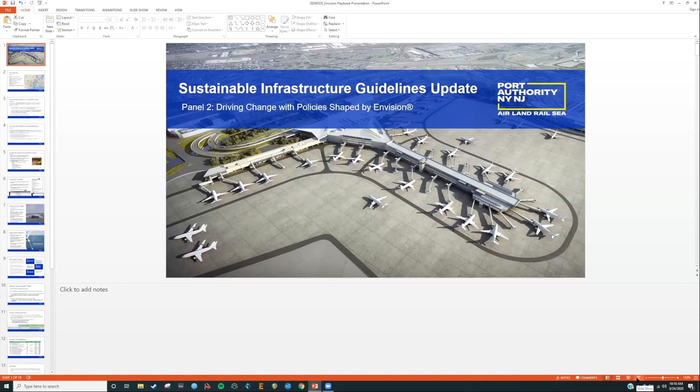Again, my name is Derek Tonning with HDR, and I'm actually filling in today for Josh DeFlorio. He's the Chief of Resilience and Sustainability in the Port Authority's Engineering and Architectural Design Division. So I work under Josh's group as a full-time sustainable design consultant. And one of my primary responsibilities in this role is leading the update of Port Authority Sustainable Infrastructure Guidelines.

And as we'll see, the update will be modeled after the Envision version 3 framework, and there'll be some modifications to suit the unique set of facilities and processes that the Port Authority has.

So for those of you unfamiliar with Port Authority, this map shows the wide variety of facilities that they own and operate across New York and New Jersey regions. They have the airports, JFK, Newark, LaGuardia, and a few others. The seaports, of course, the Trans-Hudson crossings, the George Washington Bridge, the Bayonne, the Lincoln and Holland tunnels, Port Authority bus terminal, and the George Washington bus station. There's the PATH train with 13 stations across New Jersey and Manhattan, and of course the World Trade Center complex in downtown Manhattan.

And for perspective, the Port Authority has a capital plan budget of $37 billion over the next 10 years. And this doesn't include some of the private investments that are happening with the current JFK redevelopment efforts. All told, that's about $50 billion over the next 10 years. So with a program this size and this large, sustainability is obviously very important. Everything that our group can do now, just by sheer scale, has the potential for a large net positive impact on sustainability and on the environment.

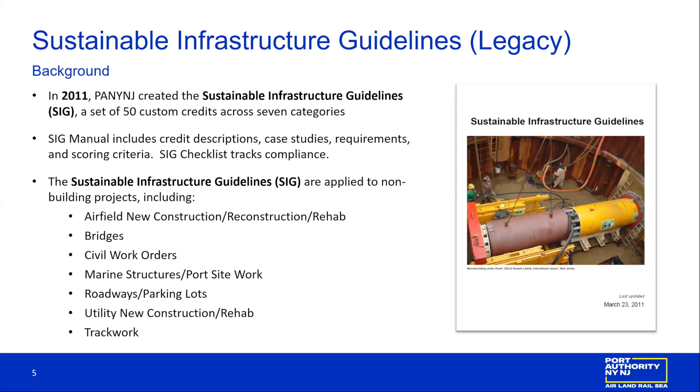The SIG will apply to almost all non-building projects that have significant scope. Some examples of common projects for Port Authority are listed here: airfield new construction or reconstruction, bridge work, marine structures, roadways, parking lots, track work. All of these projects in general will have to meet some sort of minimum threshold of achievement in the SIG.

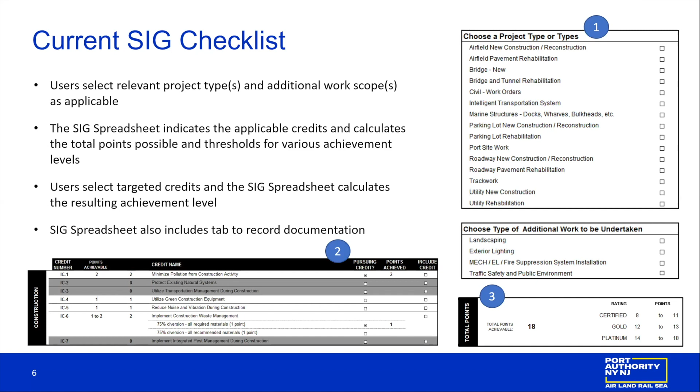So why does Port Authority need to update the SIG? Well, the obvious reason is because a lot has changed since 2011, and now there's an opportunity to align with some of the current best practices.

Since we developed some of the credits in 2011, some of these have become the norm. For example, some that cover sustainable construction practices have been incorporated into standard Division 1 clauses in the contract. So these credits are no longer really pushing the envelope as far as sustainability is concerned. We want to update some of those.

Looking at historical utilization of some of these credits, we see that some are receiving too many points for a relatively small return on investment. Port Authority definitely wants to adjust some of the scoring issues and inequities that happen, and would like to iron some of those out. In general, there are also some gaps that need to be filled in, and a need to align with more updated Port Authority sustainability initiatives.

So the decision was made fairly early on to align the new SIG with Envision. Some of the reasons for that is because it responds to a lot of the issues that we mentioned in the previous slide. Envision reflects the current best practices for sustainable infrastructure.

There's a robust and tested scoring system that's already been established. We can leverage all the pre-established training modules, the templates and documents developed by ISI. This eliminates the need for Port Authority to then have to update and maintain a custom system every so often. The system is flexible and can be modified to suit Port Authority.

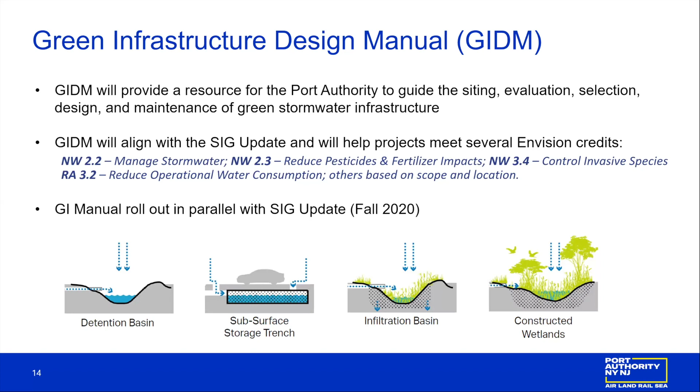Again, the rollout will be in parallel with SIG, which is still scheduled right now for the fall of 2020. With that, thanks everyone for calling into the sessions. We're looking forward to hearing from the other speakers as well, and then answering any questions you have at the end.

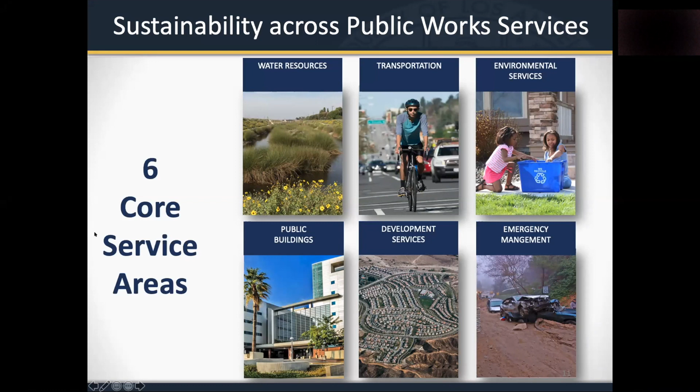The county as a whole, and LA County Public Works in particular, has always placed a high value on sustainability. Investing in sustainability is one of the key focus areas of our strategic plan, which sets the direction for our entire agency. Our administration is committed to community-based infrastructure planning to provide the most sustainable programs, services, and infrastructure to our communities.

Now, how do we apply that to infrastructure management? We believe sustainable infrastructure should be environmentally protective and directly aligned with and supportive of the community's needs by creating socioeconomic co-benefits, and should be an efficiently functioning system that enables cost savings. This new approach helps avoid a piecemeal approach in infrastructure planning and therefore manages infrastructure as one integrated system that is directly connected with the community and meets the complex expectations for modern infrastructure.

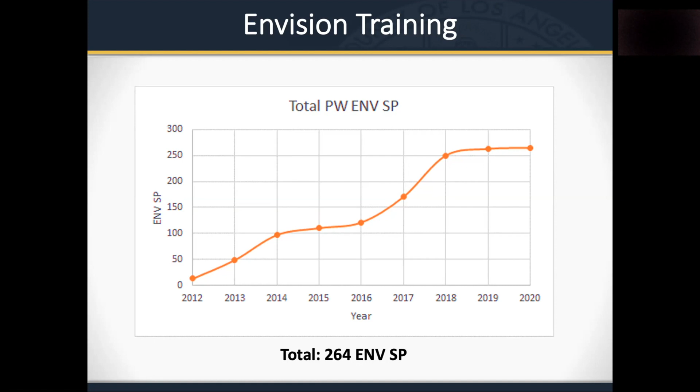Now, with Envision being the county standard, I'll talk about how we're using it to transform how we deliver infrastructure. Sustainable infrastructure can only be achieved when sustainability principles are implemented in all phases of infrastructure planning, and we are using Envision to lead such institutional changes. In the next few slides, I'll go through how changes can be implemented in planning, contracting, delivery, and maintenance phases.

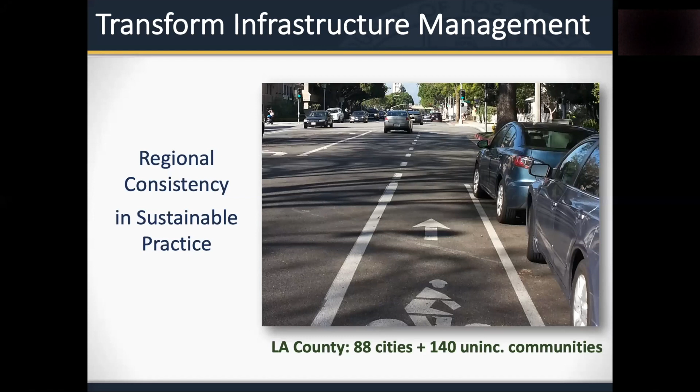Studies have said that more than 60% of material procurement in the US is through institutional procurement, such as corporations, schools, and governments. This means the power of institutional procurement can move the entire industry's supply chain. In the infrastructure sector, this includes design and construction services or material purchase for day-to-day maintenance. Public Works sometimes uses contractors to assist with project designs, and we saw this as an opportunity to integrate Envision use and rating as a deliverable by consultants. Our internal working group developed specific language in RFPs requiring consultants to have ENV SP credentialed staff on their team and experience using Envision.

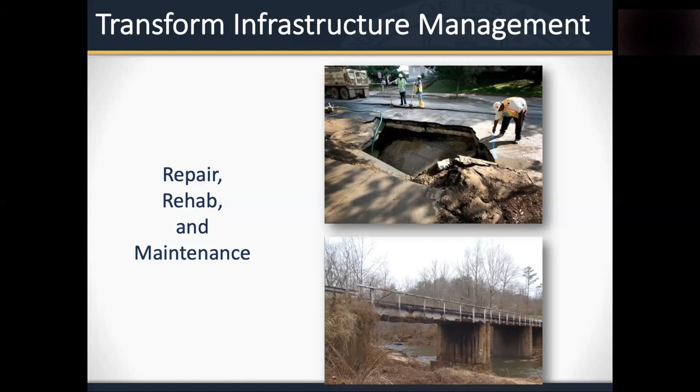Once the Envision County standard was approved, we wanted to look at ways to expand the use of Envision within our own agency. This led to the development of an internal working group called the Envision Planning Team, made up of representatives from each of our business branches.

The efforts of the Envision Planning Team include finding ways to integrate and expand Envision at each business branch in its own protocol and project delivery process. To us, Envision is more than just an award. The true value is a framework that allows us to discuss and measure sustainability across the full range of our services, from capital improvement projects with a full application of Envision, to routine improvement projects such as repair and maintenance activities with a limited scale programmatic approach. I'll show you some examples in the next slides.

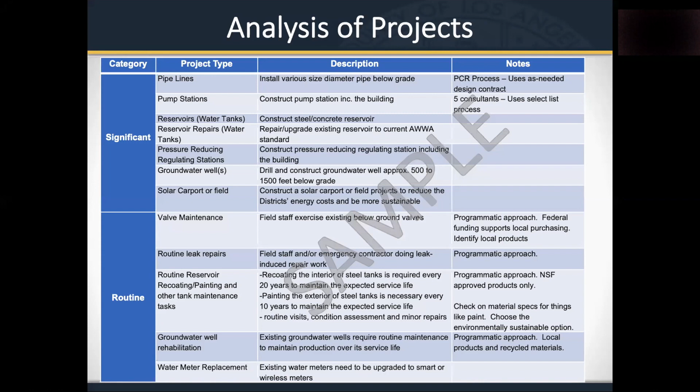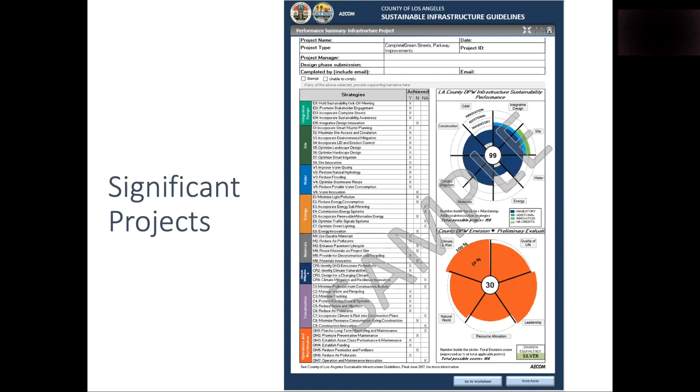This slide illustrates how Envision is applied to significant projects through the help of SIG, the Sustainable Infrastructure Guideline. The left-hand column shows the SIG evaluation checklist as a reinterpretation of Envision credits. The two pie charts on the right illustrate how a project is scored within SIG and how that scoring translates into an Envision rating. Following these guidelines, a typical project would rate around a Silver Envision rating, and it's up to the design team to decide if they should pursue additional sustainability measures.

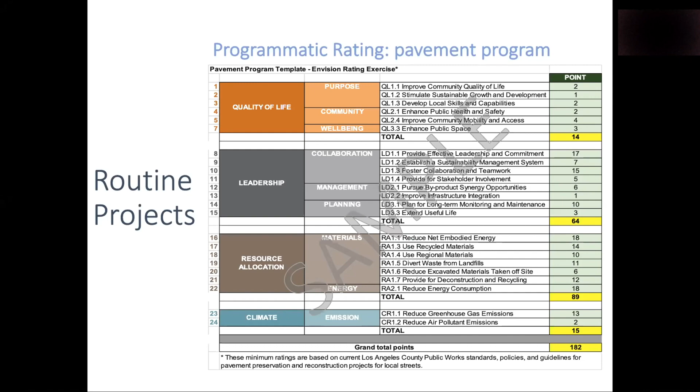Here are some quick takeaways from my presentation. First, we want to emphasize that developing sustainable infrastructure involves institutional-level changes across all phases and components of infrastructure delivery, and Envision has been the key vehicle to enable that. Use of agency- or company-wide policies and programs will expedite these changes. Dedicated analytical tools, such as design guidelines and project databases, will further help guide and track progress and identify areas for improvement. Lastly, we recommend working with other agencies and infrastructure partners in the region to ensure and enhance the socioeconomic benefits that infrastructure should bring as a system.

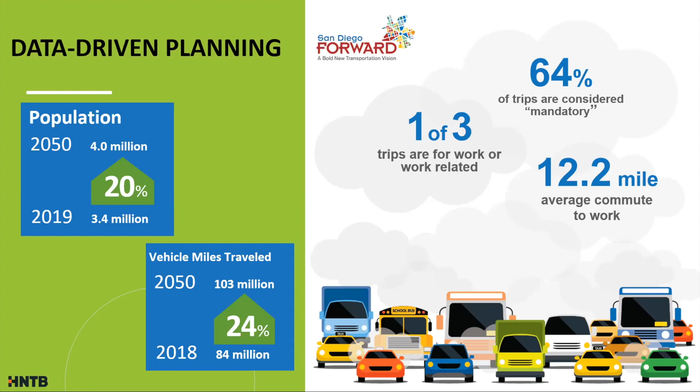So this is where the other elements, such as flexible fleets and next operating systems, become really important. Now, I can't really share a lot of the new maps since they're still being tweaked and haven't been released. But what this evolved into was some specific investments in high-speed transit lines.

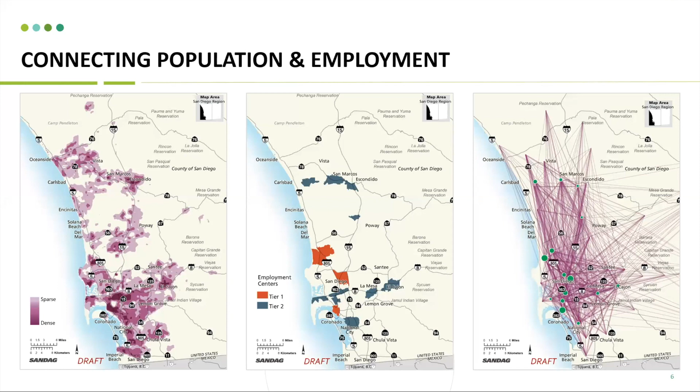There was also a lot of outreach done during this process. Usually our transportation system is traditionally planned from the bottom up. Generally, cities look at growth projections through land use projections and make their own choices about transportation systems, and those wish lists go up to the metropolitan planning organization that creates a regional vision. So it's really bottoms up, and our process somewhat disrupts this because it's looking at regional data and trying to better inform land use practices. It's a little bit in the other direction.

So it's very important to use new techniques to reach out to the community when doing this type of planning. We went out and did human-centered design, some of you might know it as design thinking, but it's really focus groups, intercept interviews, and resident focus groups to start to understand the core barriers people face in transportation.

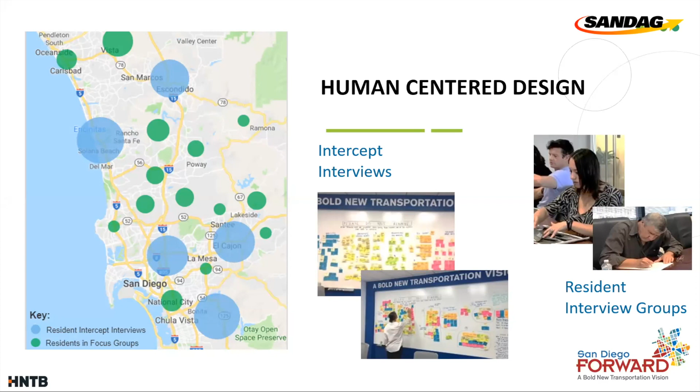You can imagine that a lot of this research yielded some inconsistencies, where people believe that a transit system should be for everyone, but also feel like the system is unsafe. Here are some of the responses - this is very interesting - safety and security was a big factor.

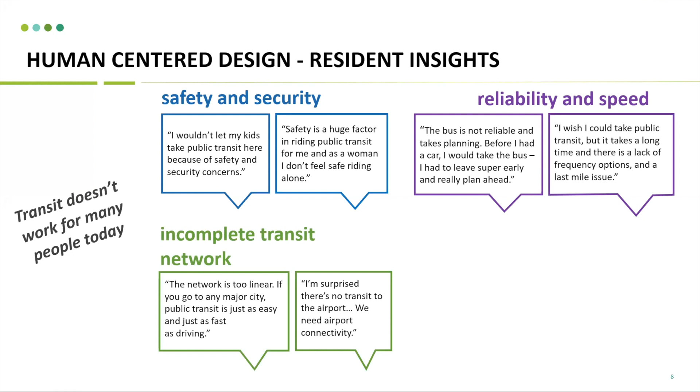Reliability and speed - in San Diego, most transit trips will take twice as long as an automobile, so most people don't take it because of the time and unreliability. There's an incomplete transit network - it can be very circuitous as you try to reach all areas with one line, with one route. And it's really inadequate for people who are transit dependent, needing more school bus-like services.

We have unsafe biking conditions that were also called out, along with micromobility infrastructure and regulations. We've been playing around in this country with micromobility for the last 5 years at least, but we really haven't thought through how our infrastructure can serve these new technological solutions. They are a barrier and a safety concern if you don't have the appropriate infrastructure for people to be safe and store them adequately. So to me, infrastructure is a huge piece of making sure micromobility works, which can take on the short trips in many cases.

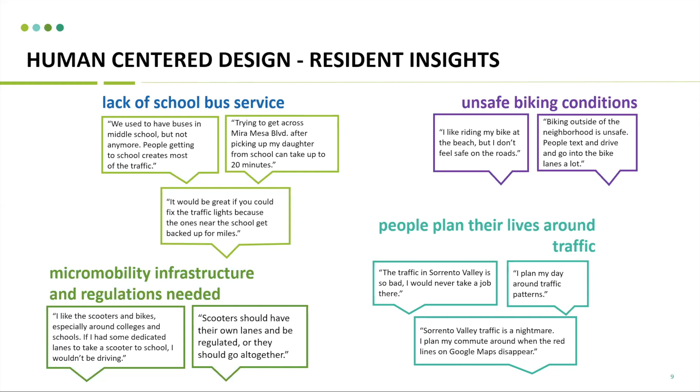Really everybody's used to planning their lives around traffic, and so travel behavior is also informed by how we feel traffic is going to be. I come from Costa Rica, and in our traffic jams it might take an hour to travel a mile at peak time. So you experience distance differently by the speed that you can travel, and that has both good and bad consequences, of course. So without further ado, that's a lot of information.

We've done a lot of analysis as well. I wanted to mention there's been a lot of performance measures - part of the reason it's important to think about our priorities, what we want to prioritize in a sustainable transportation system, is because what we measure is how we guide our measurement system.

This long-range regional plan will measure greenhouse gas emissions as a key metric, and vehicle miles traveled is a key metric. We also look at crash statistics, which are correlated with vehicle miles traveled, and highway infrastructure conditions. We look at whether the system will serve communities of concern - where they live, people with lower incomes, racial disparities, or age is also a factor when looking at communities of concern. There are many elements that will be measured and evaluated, and data is being used to prioritize certain systems.

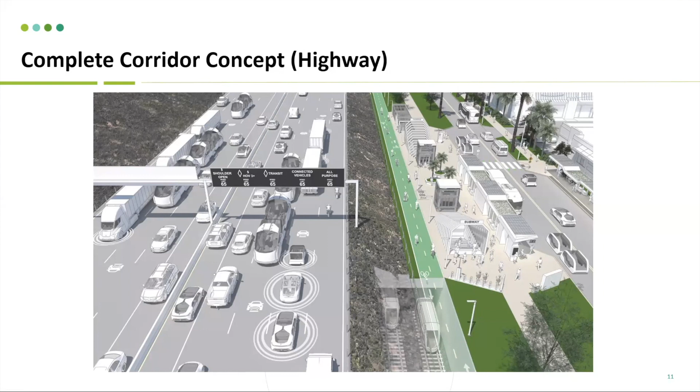To show you a little bit of what the future might look like, here is a complete corridor concept, a highway concept. The complete corridor concept is sort of like an envelope, looking at how we can make sure that everything functions in an overall system. I'm going to start highlighting some of these elements.

We can see the active transportation here, making sure that you have appropriate connections, sidewalks, and walking experience to reach this connection point, and also that you have an active transportation network connected to the overall network. That it works alongside it is a crucial point.

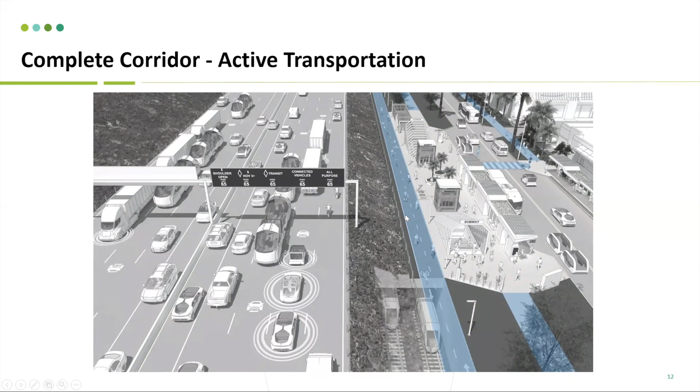Then we can look at the transit, so we can see high quality rail, high speed rail essentially. We're also thinking about bus rapid transit, BRT, and how this might look in 2050 - a managed lane, a dedicated lane for bus rapid transit with vehicles that are actually platooning, so you can have a flexible train system when you have autonomous and platooning vehicles. The infrastructure needs to be built envisioning this new type of movement.

This is a dynamic board, so speed limits might change dynamically, and which lane serves which purpose or which mode might change. You can see here they're also envisioning wireless charging, so these vehicles will be electric and will be highway charging as you move through the lanes for transit vehicles and perhaps even regular vehicles.

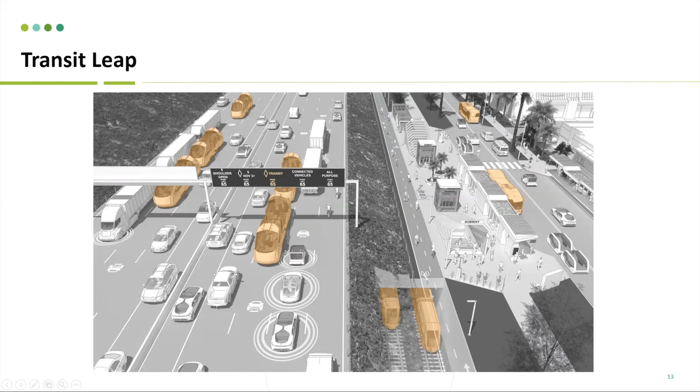They also have transit vehicles on the arterials as well, and regular buses. Then there's the mobility hub concept, which is really intended to be the transfer points. The mobility hub concept in San Diego is also a little broader than what traditional mobility hubs are.

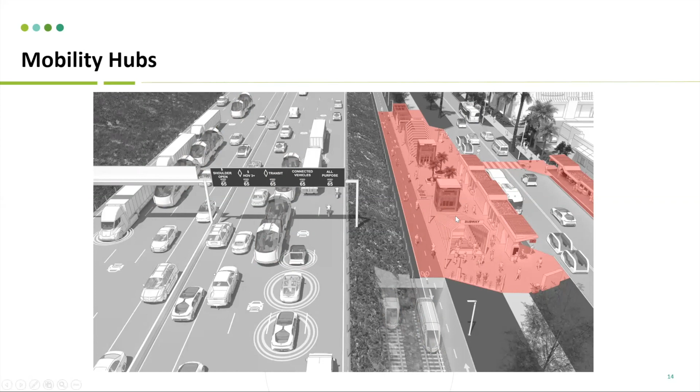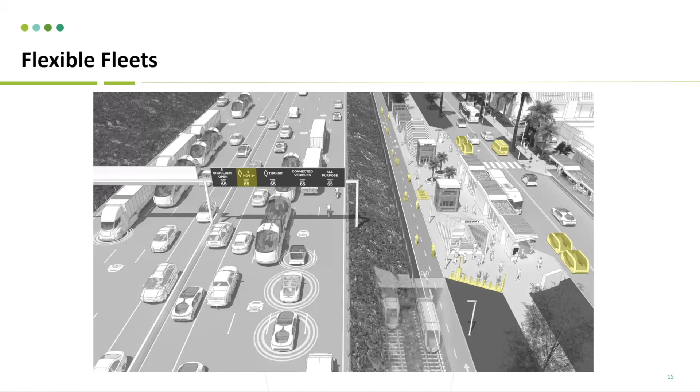Then the flexible fleets - it goes from traditional carpooling, which is already a program of the MPO, to bike share, any type of micromobility, scooters, segways, personal transportation systems. You also have autonomous vehicles that ideally would be shared, so you can hop out of the transit system and go your last mile in a shared vehicle. Obviously urban delivery is going to be more and more important these days, so that's also being considered in the transportation system.

Ultimately, the next layer here is really depicted as the information that is provided in the transportation system. This is a traditional way of depicting connected vehicles - you can have freight vehicles platooning here over the highway, with these vehicles communicating with each other and also communicating with the infrastructure.

There's a particular lane here, because if you have connected vehicles, there's a different type of movement that can happen, and safety is a different element, let's say. So you might have special lanes for connected vehicles.

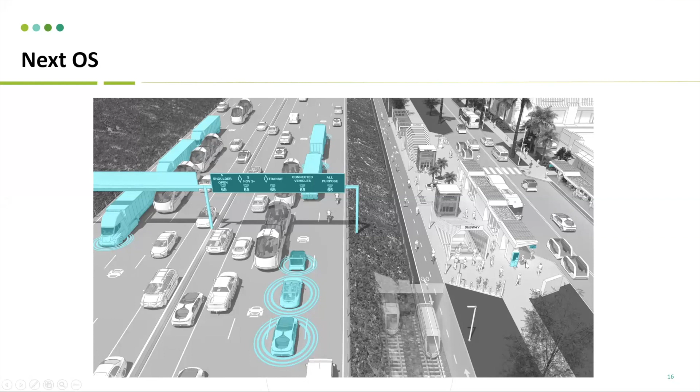It's also very important to ensure equity - kiosks or Wi-Fi, even if you have a smartphone and don't have Wi-Fi. Hopefully by 2050 we won't have those types of digital divides, but it is important to envision that anyone can access this information platform through any means, even if they don't have a mobile device.

Here's another concept of an arterial. You just saw the highway concept - this is more of an arterial where you can see another part of the element is the drop-off and pickup points. This is how you would allocate for drop-off and pickup in front of a transit station, for example, navigating drop-off and pickup of small fleets or flexible fleets with the stops for the larger transit system as well.

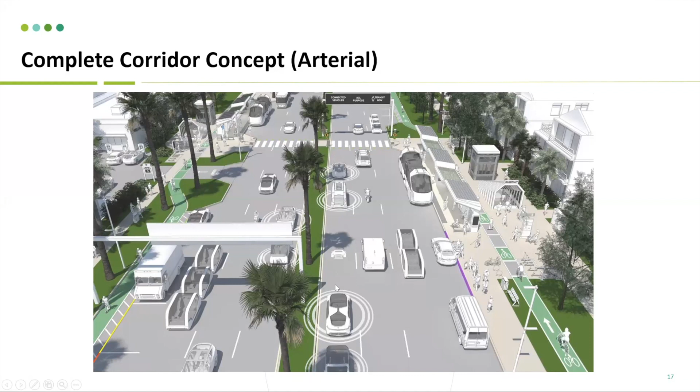You can see electric charging over here off-site, and the active transportation network, high-quality infrastructure for this type of vehicle, also wireless charging in the arterials, and even some infrastructure for connected vehicles for all purposes. This is a way that vehicles will communicate with the infrastructure and denotes a connected vehicle environment. So even arterials will be managed in some way through information.

That concludes my overview of what San Diego is doing to try to reach sustainable requirements.

I have been thinking lately, as we experience this new transportation system, what does it look like post-COVID-19, and how do we need to plan for it? It might be that we very quickly get over this and it's a blip in our history, but it can also mean that we have lasting impact on how we plan and think about transportation infrastructure. So two elements is what I'm looking at and thinking of most today.

I don't think anyone can really plan for it yet, or predict it yet, but we can suspect that travel behavior might change significantly. There might be more remote work going forward. I think if this is working for a lot of people, this is what it might look like, at least in the near term. Definitely more freight and urban delivery. We are going to get used to ordering online and having goods delivered to our home. So less VMT, perhaps, from remote work, but more VMT from freight and urban delivery. How does it add up to the vehicle miles traveled in general?

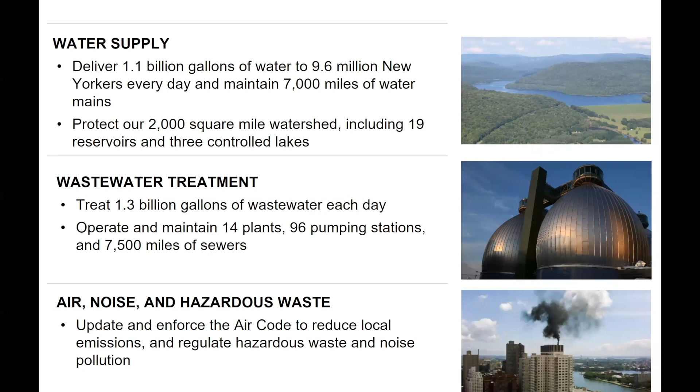I work within the Bureau of Engineering, Design, and Construction. If you were on the webinar yesterday, Ashley from NV5 discussed how they work with DDC, the Department of Design and Construction, to handle various construction projects from New York City Department of Transportation and New York City Department of Environmental Protection.

A lot of our smaller projects, like green infrastructure installations, go through DDC, but our larger capital projects are done in-house through the Bureau of Engineering, Design, and Construction. Whether we have a consultant designing or an in-house design team, we manage it in this bureau.

So this sustainability section is within that bureau. We're able to apply sustainability to all of these projects, which may be traditional gray infrastructure projects such as tunnels or treatment plants, but we're able to look at it through sustainability by implementing it through our program here.

The Bureau of Engineering, Design, and Construction manages approximately $21 billion of projects in construction or design, and provides in-house engineering services to the operating bureaus of water supply, distribution, and treatment.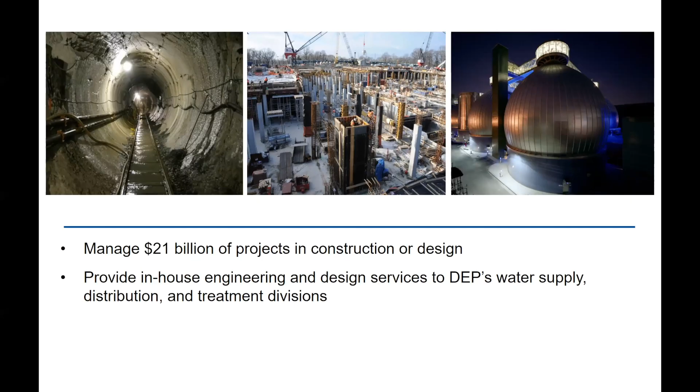Our vision statement: to be a world-class water and wastewater utility while building a sustainable future for all New Yorkers. This really shows the importance of having an active sustainability program in DEP so that we can make sure all the capital projects we are building are targeted towards developing a sustainable future for water supply and wastewater treatment.

So how does DEP actually go about using Envision? Taking a step back, looking at the timeline of how we developed our sustainability program: we created it initially based on the triple bottom line concept, as well as largely motivated by broader New York City strategic plans like PlaNYC. More recently, a lot of our initiatives have been driven by OneNYC, which are our broad citywide goals. Early on, we identified Envision as a flexible system that we thought would be useful.

We were looking to develop some kind of rating system, and we looked into approximately 50 different rating systems, some more well-known like Envision and LEED, some less well-known. We considered developing our own rating system similar to what Port Authority has done.

Ultimately, we decided that Envision would be the best way to go forward, as it not only is flexible and could fit all of our projects, but it also made sure that we would have that third-party certification compared to developing our own system.

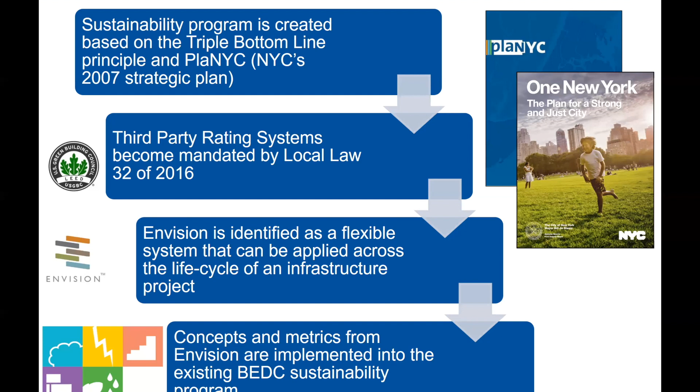This is a pretty familiar project delivery timeline to most of you. It's the same timeline we follow for every project, whether it's a $1 million project or a $1 billion project. We start with an initial business case review where the sustainability section provides input, getting an idea of any local law compliance issues or large sustainability opportunities we'd like to highlight in the project contract.

Then moving into planning, we have a preliminary sustainability workshop, which is the big milestone workshop where we sit down with all the stakeholders for the project and set goals on our 6 different key performance indicator categories.

So sustainable sites, energy, climate change, environmental impacts, and greenhouse gas emissions. When we are at that workshop, we discuss all the opportunities that we see on that project and which ones are worth pursuing at this point. We also discuss third-party rating systems because it is an opportunity for us to incorporate Envision into the beginning of the project in the planning phase and make sure it's engaged throughout the entire design lifecycle.

Further into design, we have our second workshop, which is a deep dive sustainability workshop. At that workshop, we're able to make some more data-driven decisions. We have various reports due prior to that, and based on those reports, we're able to decide what's actually feasible based on the numbers for things like energy reductions and construction waste reduction and such.

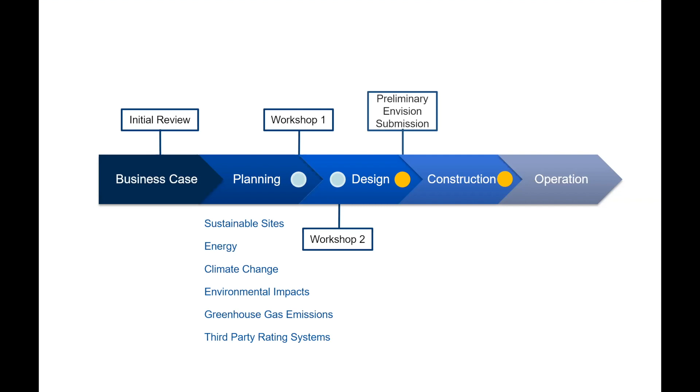Going to the end of design, we have our preliminary Envision submission, and then at the end of construction, the final submission. Through all of that, we have incorporated Envision throughout our entire program, and whether a project is submitting to Envision or not, we've developed our program to report out on various metrics. So the core of it is really aimed at quantifying sustainability on all of our projects.

We've developed a series of standard operating procedures which apply throughout design, covering a wide variety of topics ranging from energy reports to climate, stormwater, recycling, regional content, construction waste, and so on. Each of these reports gives us a lot of data for each project, incorporating the data requirements for the Envision application, as well as other related New York City guidelines and local laws. Following all of these standard operating procedures generally will keep a project in compliance with local laws, give us the information we need for data tracking, and also set it up well for an Envision application.

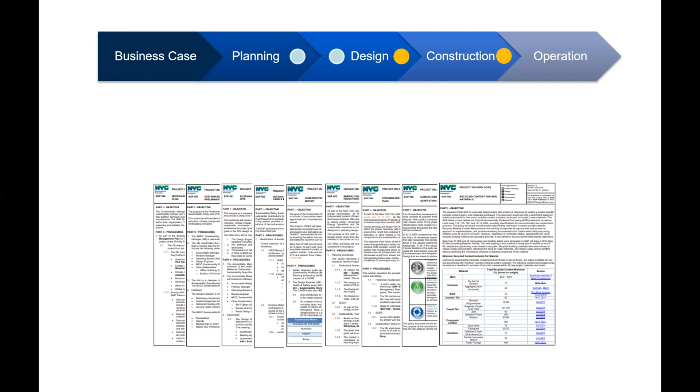Just to zoom in on one of these standard operating procedures, SOP 052 is the one that guides us on our sustainability rating systems. Any project that looks at this SOP will, at the very least, pursue Envision to the stage of a checklist. They'll fill out the checklist and use it to identify opportunities for incorporating sustainability into the project. And if it makes sense to pursue an Envision application, this SOP will guide it through that process as well. One major cue we took from how Envision is structured to make certain credits non-applicable, we are able to adjust the applicability of these reports based on the scope of the project.

So for example, if we have a bridge project, we wouldn't be expecting a very detailed energy profile report. It's able to be adjusted per the scope of the project, but it provides a strong baseline to work with.

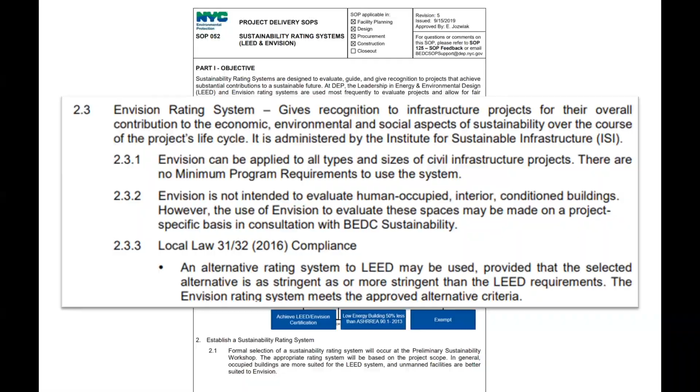So some initial results of our program here. As I mentioned, all capital projects are using Envision as a tool to identify opportunities for incorporating sustainability. Our SOPs are based on the Envision rating system, so the reporting requirements will keep us in compliance with local laws, as well as provide a strong case for the Envision applications.

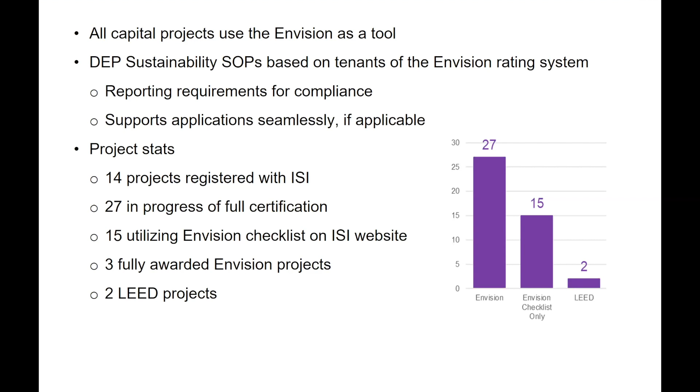Some initial stats: we have 14 projects currently registered with ISI, 27 in progress of full certification through various stages of the design life cycle. 15 are utilizing the checklist on the ISI website, and we have 3 that have been fully awarded at this point. We also have 2 LEED projects. Most of our projects are unoccupied infrastructure, so occasionally we have an occupied building that might make more sense for LEED, but in general, we're focused on Envision.

So 2 case studies today, really briefly. The first is the Esopus Creek Bridge replacement. This is a really cool project, an upstate project—upstate as in north of the city. We have the watershed in the Catskills here in New York, and we maintain a number of bridges, reservoirs, lakes, roads, and such to both protect the watershed and maintain constant delivery of water to New York City.

So these 2 bridges, the Esopus Creek Bridge, shown here highlighted in green, and then the Railroad Bridge here, are both in varying states of disrepair and need significant structural repairs. We'll be replacing the bridges as well as the roadway highlighted. In order to maintain travel and minimize the detour for the local community, we're actually going to be building the new bridges and roadway adjacent to the existing ones so that we won't be disrupting the community as much.

This abandoned railway here is slated to become a rail trail. Through communication with the local community, we determined that they would like to see a pedestrian connection to that rail trail. So we're providing a dedicated protected bike lane and pedestrian lane with a parking area here for visitors to the rail trail.

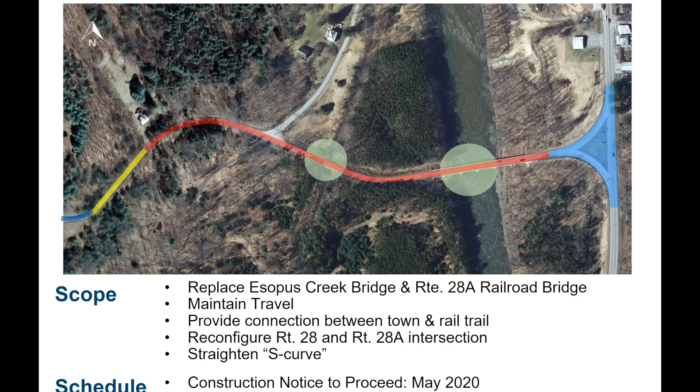Some highlights of the Envision application for this project: enhancing public space and improving access for the local community, heavily focused on the rail trail connections. Preserving views and local character - we made sure that the new bridge designs are consistent with local character. Signage and wayfinding improvements through things like improving the safety of those intersections and the roadway.

We have an established sustainability management system on all of our projects, and through that, active stakeholder involvement through community meetings and such. For resource allocation, we're projecting a 90% diversion of waste from landfills, as well as 25% recycled materials. Now this may seem a little low.

However, being a road and bridge replacement, it is mostly asphalt, so we're projecting about 40% recycled asphalt, and then 100% regional materials. Also, through all of this, we have implemented sustainable stormwater management.

It looks like we may have lost Angelo briefly. Hopefully he'll be able to join in shortly. In the meantime, I'll just use the time now to make some final comments, and then hopefully if Angelo pops back on, we can get him back to finish his presentation. It was really a great presentation, so I'm disappointed that it got cut off.

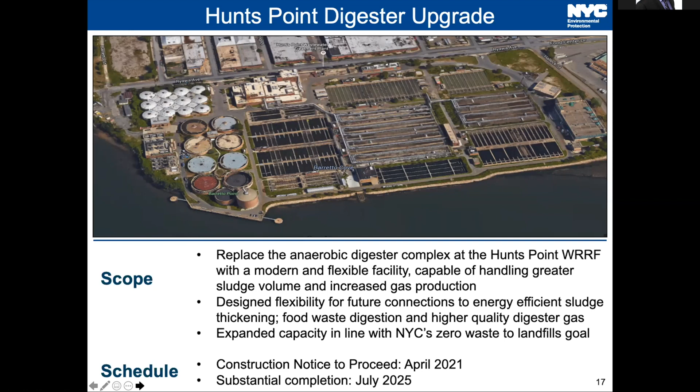Thank you. So that highlights most of the things. Just wanted to reiterate, through restoring the brownfield and creating a new public space for a park, we've done a lot of work with the community for that.

We're also anticipating 100% diversion of waste from landfills and 89% regional material. Additionally, landscaping and sidewalk repairs to improve park access and minimize to no pesticide or fertilizer use in the new park.

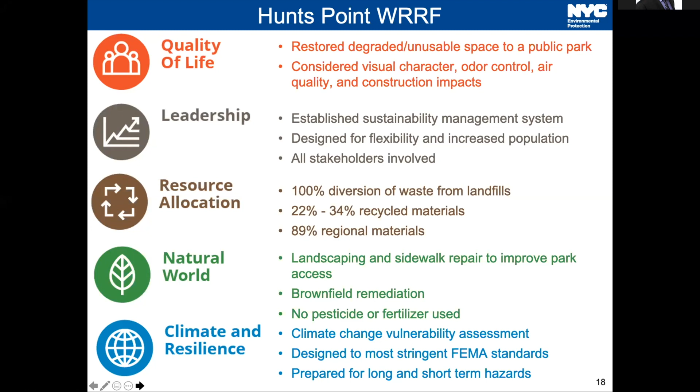Lastly, this facility, through designing to the most stringent FEMA standards, is well prepared for long and short-term hazards. Next slide—so I'm just going to quickly cover some programmatic adjustments that we've made from version 2 to version 3.

As many of you know, there's been some significant changes. Multiple credits were rewritten, combined, and added. I'm not going to cover all of them by any means—I just want to highlight a few new opportunities and challenges that we've identified.

New challenges: reducing energy consumption has also been split into an operational and a construction component. Our current energy reporting mechanism is largely focused on operational energy, but we are looking to track construction energy use more in detail. Right now we just have some best practices implemented, and we're developing ways to actually quantify that going forward.

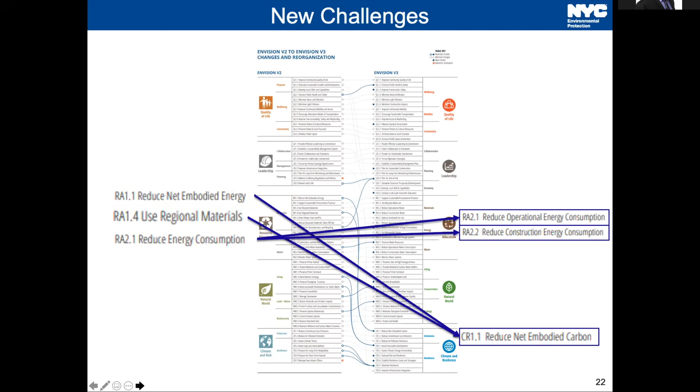So overall, next steps: integrating construction credits tracking. We're still largely focused on planning and design, and we're looking to get more into tracking throughout the construction of a project, whether that's potable water use, energy, or waste.

We are working to identify more opportunities for community engagement and improve quality of life impacts, using Envision quality of life credits as a way to quantify the intangibles of different quality of life improvements for the communities we're serving. And lastly, quantifying net embodied carbon.

Overall, the point I'm making is you can see how we have this robust program here at DEP, with a variety of standard operating procedures and reporting structures that pull a lot from Envision, as well as compliance with local laws. Having this programmatic approach allows us to go from project to project, understanding how we can improve the program with each opportunity on every new project, and how to build the program up with the new developments that each project is able to take on.

As major changes such as new local laws or an Envision update come along, we don't have to rewrite an entire program, but rather we can go and revise a single standard operating procedure to update as needed. So we're able to move along in a much more agile way.

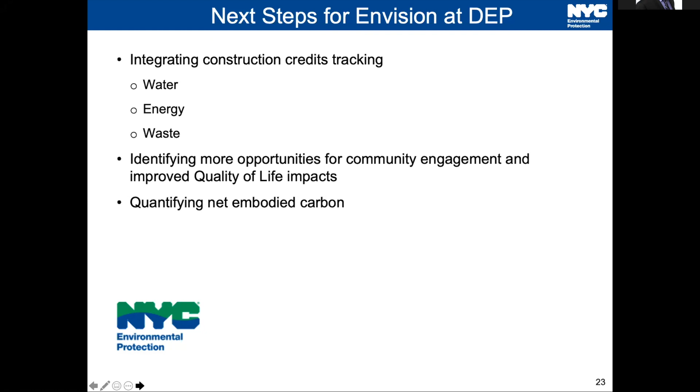Our last slide here is, again, DEP's vision statement: to be a world-class water and wastewater utility while building a sustainable future for all New Yorkers. Just a reminder that for all of these typical gray infrastructure projects, there are ways to apply sustainability—whether it's a simple wastewater pumping station upgrade or a full-on tunnel from one reservoir to another.

We're able to identify the opportunities in each and fit our program to make sense for that.